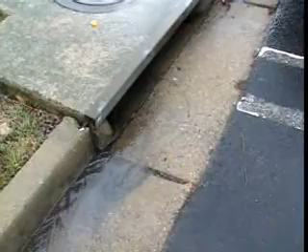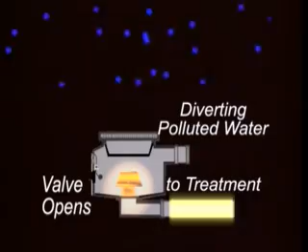Whether through spillage, industrial discharge, or as hydrocarbon buildup at parking lots or storage areas, two of the greatest challenges to clean water are industrial washdown activities and rainfall. Many pollutants enter the water system through the first flush, the first few minutes of falling rain. Wouldn't it be wonderful if pollutants could be skimmed off the rain or wash water, diverted away from the natural water runoff for treatment, and the clean water could proceed to the main drainage system? What a great idea!

Automobiles and non-point source pollution right now, fertilizers from agricultural, those are the real problems. We have a pretty good handle, I think, in the country on our point source runoff, for example, wastewater plants or industry in general. So it's the non-point source pollution that we have the real problem with, and it'll be the hardest thing to tackle right now.

Let's face it, we live in a society where huge amounts of pollutants are generated and easily washed into our water sources. And it is much harder to remove pollutants from the water once mixed together. The best solution is to divert and treat pollution before it enters the stormwater runoff system. Fox Environmental and Wastewater Diversion Systems bring you a variety of washdown, first flush, and spill protection systems. With a little forethought, even a small investment will provide enormous protection to our environment.

Well, we're using some of the Fox flush system, first flush on the base, a couple different places. We have some demand systems at some wash racks. We've just built a sediment wash rack with a very long trench to capture sediment, but at the end of that we also put in this system to pick up the hydrocarbons that might be in the water.

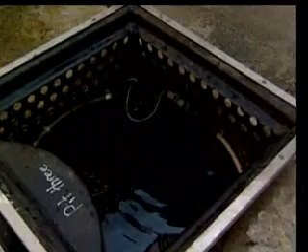We also just constructed the large one at the 240th motor pool, and it has a sluice gate valve on it. The reason for that is there could possibly be large quantities of petroleum there, tankers, 5,000-gallon tankers, and we want to be able to detect that if there's a large spill and basically shut off the pipe and have barrel storage in the pipe so that we can respond to that quickly without polluting further downstream. And that's critical to us because right downstream from that, another 20 feet, is the National Park Service, and they are very intense on pollution prevention in their environment.

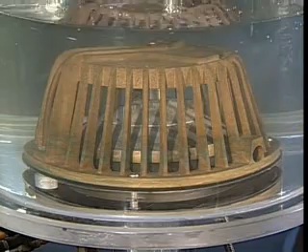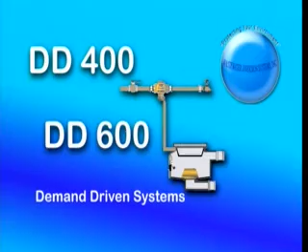All systems are based on the proven design of the Fox diversion valve, which is the original, and still the simplest, way of ensuring the diversion of contaminated runoff away from the stormwater system and subsequent waterways. Let's look at each model and its application. The DD400 and DD600 are used for washdown applications. The DD400 is installed for waste bin wash areas or residential car wash areas, while the DD600 is used for larger applications, such as truck wash depots or commercial garbage bin areas.

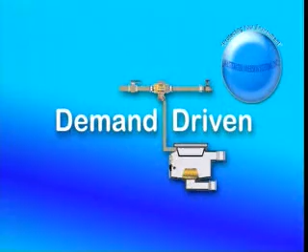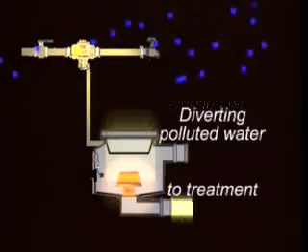Washdown waters will contain not only detergents, but also significant amounts of free-floating hydrocarbons, such as leaking oils, gasoline, and lubricants. The DD stands for demand-driven, and the working mechanics are simple. When the washdown hose is in use, a sensor opens the pit valve, diverting the contaminated water to a holding tank for treatment. When not in use, the valve remains closed, diverting clean rainwater to storm drainage.

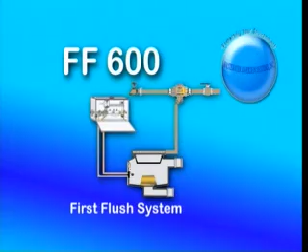An FF600 system is used for areas so large or open that pollutants accumulate despite good washdown practices. These locations can be airports, large truck maintenance areas, construction equipment storage sites, and large parking lots. If there are any contaminants left on the surface, they will be washed into the storm water system with the next rainfall. Diverting this contaminated first flush of rainfall creates enormous benefit to the environment.

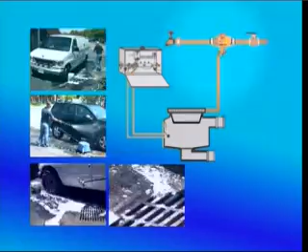The Fox Model FF600 serves two functions. It is a demand-driven system that can handle several washpoint locations, diverting washdown pollutants to holding areas for treatment. When not in use as a demand-driven unit, it serves as a first flush application, controlled by a programmable sensor that effectively measures and diverts the first flush of rain to the treatment area.

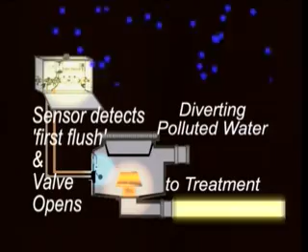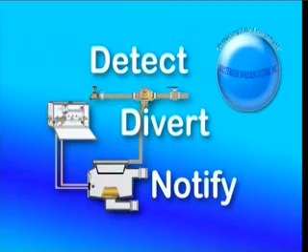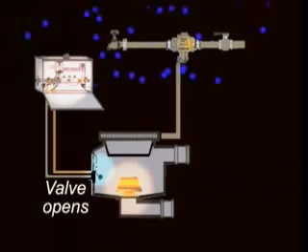The Fox Model SCS600 diversion system is designed to detect, divert, and notify when there are free-floating hydrocarbons in storm water runoff. During normal operation, all rain and washdown runoff leaves the protected area through the SCS600 chamber. A sensor in the chamber detects the concentration of pollutants. If the sensor detects a significant volume of hydrocarbons, indicating a spill, the system sounds an alarm, opens the valves, diverts all flow to a holding area, and prevents the spill from entering public waters. For added security, the entry points can be gated and closed to ensure that the spill is contained.

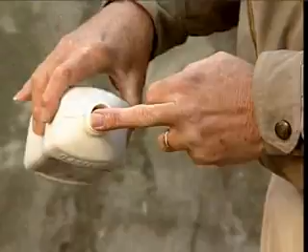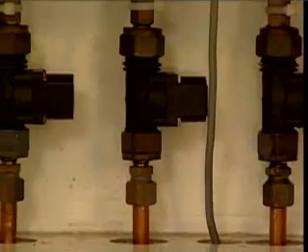At this location, for example, the sensor detects the motor oil. The valve opens, diverting the pollutants, and the gates close to completely contain the spill. When the sensors detect no more hydrocarbons, the valves close and the system continues to operate as a first flush system. The SCS600 is usually programmed to cycle regularly to prevent any pollution from entering public waterways. This system is very effective at protecting sensitive areas, such as parks or farmlands, which are located near a large commercial or military installation.

The Army is a steward of the environment. We control a lot of critical habitat, a lot of land in the country. At Fort Lee, the Environmental Management Office's motto is protecting the land we defend. So that kind of succinctly tells you where we're coming from here. Environment is a mission of the Army. It also allows the troops to continue their training mission, and when they continue their training mission, then they can adequately protect the country.

Wastewater Diversion Systems has installed diversion systems in Richmond, Virginia, Norfolk, Virginia, Los Angeles, California, and elsewhere. Our clients would be happy to talk to you about the effectiveness of their systems. Even the smallest installation of a water diversion system makes an enormous contribution towards a cleaner world.